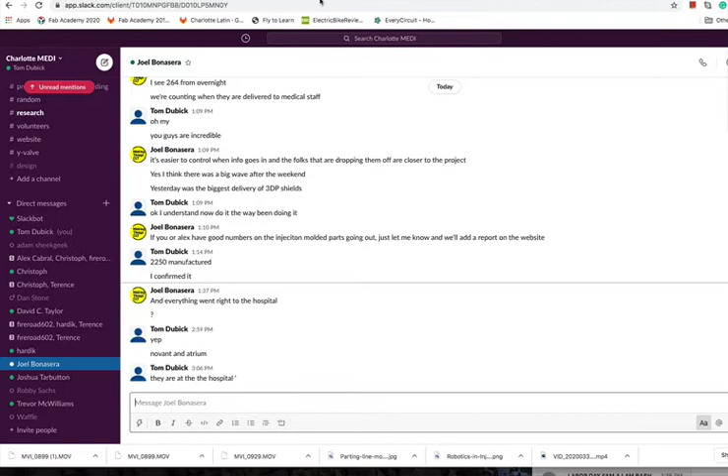All right, and I'll use Slack. We're going to show that they are at the hospitals. All right, so we'll come back to that in a moment. I may go ahead and edit that later today so we don't flash his email out to everybody in the world on Slack, but that's what it is. Let's go back over here.

So let's go through this real quick, shall we? Quick review. Let's do this, let's start from the beginning. Bear with me one second. Sorry about this, all right, hopefully you're seeing this up here.

Well, that didn't... what the heck? That's annoying. Mr. Dubick didn't click on the right square there. All right, so here we go. All right, folks.

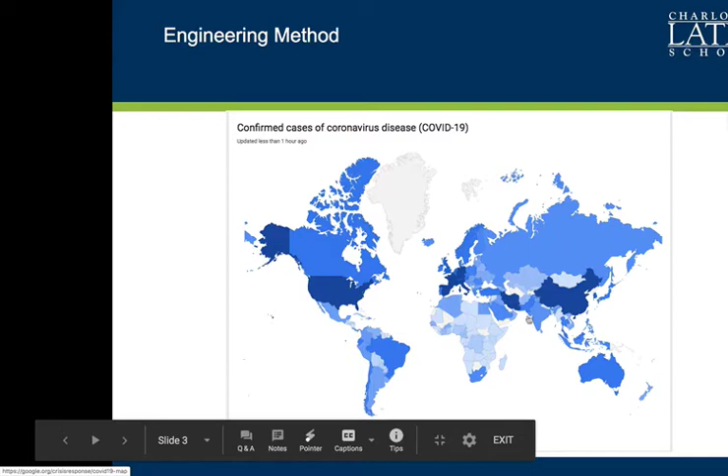Let's check where we are. The outbreak is still pretty much here, though it's now starting to show up throughout the rest of the world, which is pretty much guaranteed. That's the nature of a virus, it's really hard not to spread.

Let's see what we are today. How many total cases worldwide? Now we're getting at 9/10 of a million... 900,000. The United States now leads the world significantly as the biggest country that has it, with over 200,000. China was at, to give you an idea, 81,000. Italy was 110. So there we are with that, okay.

About 10% of deaths occurring in the United States that we know of. These numbers on deaths and recovered are going to be very nebulous, we don't really know all over, all right. And that's out of a lot of people, folks, out of a lot of folks.

All right, now I'm trying to... okay, then we're going to go to this. I think we're going to see this spiking up more. There we are, okay, I agree to that. This is where we kind of knew it was going to head to, and now it is here in a big way.

They've got all their paywall stuff, pay stuff there. All right, here's the United States. China's curve flattened, Italy's curve is flattening some, it's not going straight up anymore. But the one that's just off the charts right now is us, and we're at over 188,000 cases. So we need to get that to flatten.

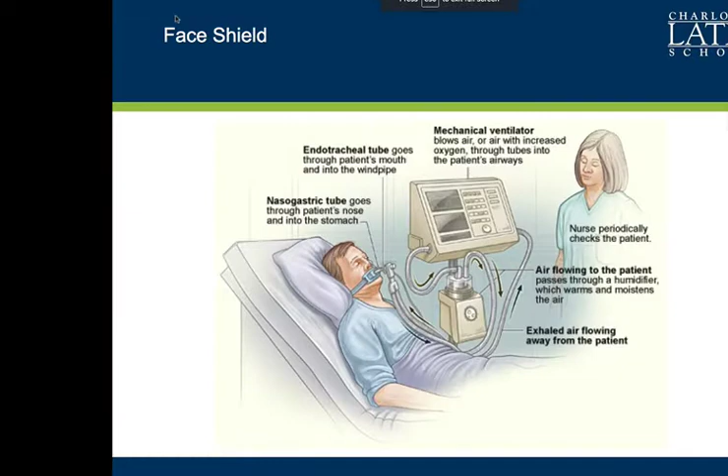Okay, so that's where we were with that, and it is what it is. All right, we talked about there's a shortage of medical professional PPE, that's what you hear about. And we talked about that engineering design process being really important to this. So, as we thought, time to make it, materials, equipment, prototyping, cost.

It's what you're always considering, and a lot of these things are honestly true every time you do an engineering problem. It does matter what the material is, it does matter what equipment you're using, all those things are true. What are the medical staff saying? That's one thing others do, research when you do things.

And that's a mask we decided not to actually use, so now we're using the face shield. And like we just said when we started over, I think we're going to be over 3,000 face shields today, which is kind of amazing. As we got, when you do the engineering method, come up with your idea, but then test it, iterate, make it better. I can't stress it enough. As you go on to be engineers and technical people, see, there's R1, it was too small, R2. We don't even make the RC1s anymore, we make only RC2s.

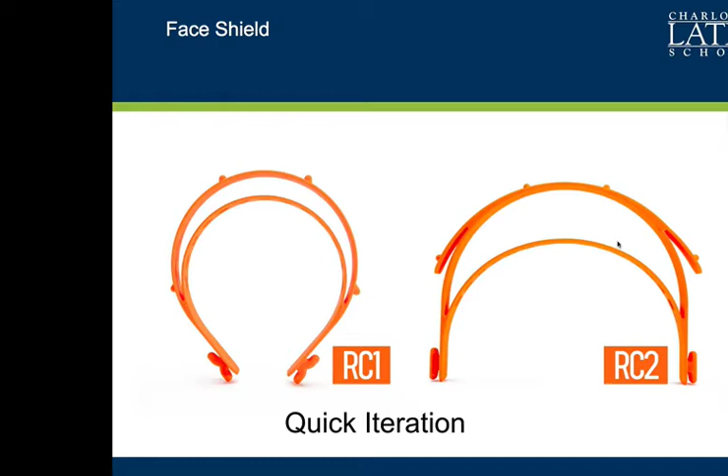And there's an RC3 version, but we're not going to worry about that one right now because at this point, we've got something that's working and we're going with it. You get feedback, you're going to have failures, that's all good.

Also, you want labeling, so I'll give you an idea. See how the clear strap only goes to the headband here? Don't worry about the colors, you can tell we had just different people printing it. Up here it gets much bigger.

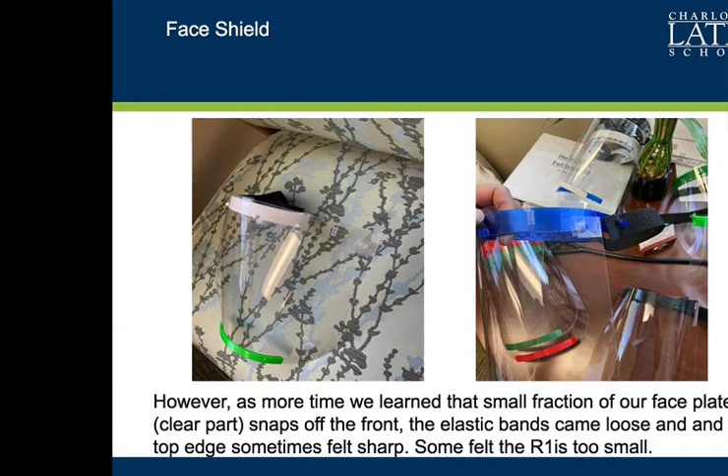And we started our Facebook page, which, by the way, what's that up to these days? We'll look that up. All right, GoFundMe.

Oh, GoFundMe, face shield, faceplate Charlotte. You think I've been looking at it enough now? I'll go find that. There we go.

All right, we're at $92,000. Not too shabby. And what that allowed us, that's not what I wanted, I don't know why they did that. But it was at $92,000.

And what that does, and I would highly recommend doing that down the road if you're ever in a project like this, it gave us money while other people were busy having to raise the money, convincing people it was important they got their money. We were able to get going, which is indeed very fortunate.

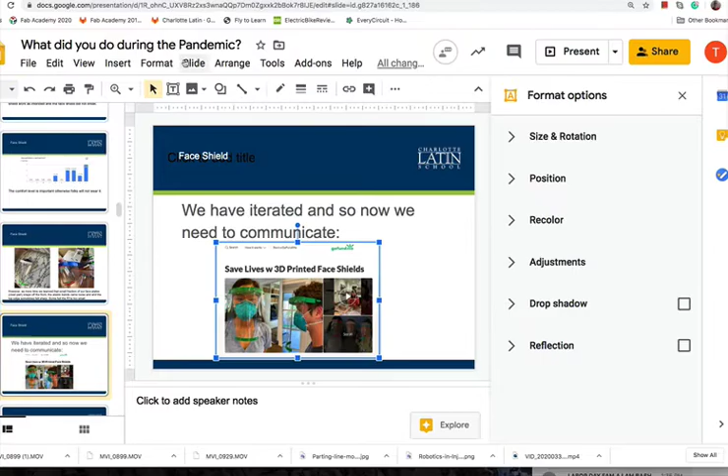Okay, and that also shows you this became Medi, Charlotte Medi. It became more than the people I'm involved with, much bigger than me, much bigger than the other people involved. There's now hundreds of people involved, probably nearly 100 people involved now. I know we have 50 families or so, it's got to be that.

So with that in mind, Slack and GitHub, I want you to see Slack now. I'm going to bring up a version of Slack. Hopefully I can get out of that. All right, I'm going to go over here, switch to, young engineers of today. All right, this is what I want you to see.

And I'm going to ask your folks, I've been very impressed with this. So what Slack does, if you're ever in a big group, you got to organize it. Maybe you're going to do some kind of school, raising money for your basketball team.

Hey, Carson, glad you're with us, buddy.

This is what Slack does, and we can keep adding channels. So let's learn about Slack. I got a column there, channel, create a channel. So a channel could be making contacts, contacting folks. Contact, well, that might even be on there, but let's see. Let's say contact, okay, create.

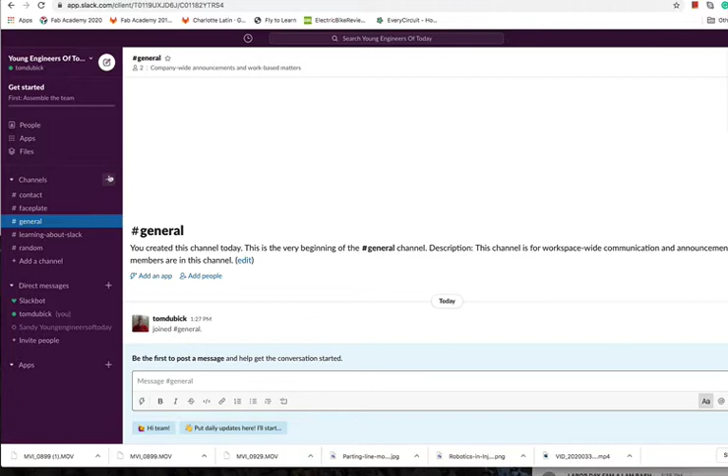There's a visual programming language for processing that we're going to be doing. All right, so we create that group, then anybody in their group has that, you can add all the people into it. Whenever they were referring about processing, we post them there. So I would highly recommend this, I'm sharing this with all my students. Down the road you'll go into the workforce, and if you're a tech person working with software, you're definitely going to see that. The other one you're going to see is GitHub. We'll come to that down the road.

All right, so now, having said that, we'll get into something that's actually going to look pretty cool. So that was a quick 3-minute summary of what we're doing.

Now, there's a 3D printer, and that's versus injection molding, and I said we'd talk about it. One 3D printer will print 4 shields in 8 hours. Injection molding prints 4 shields in 1 minute.

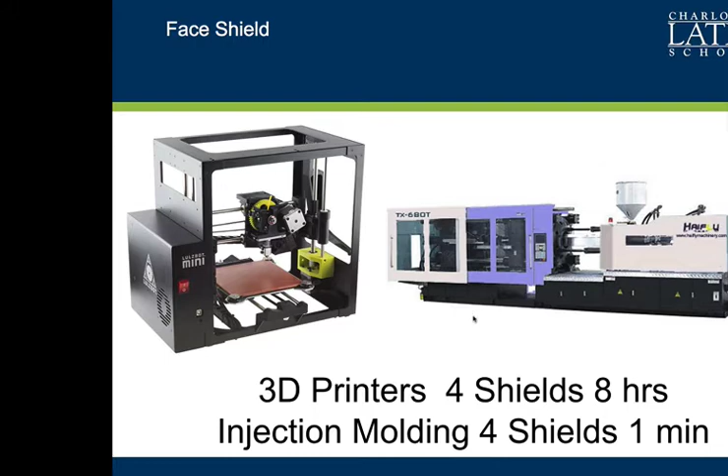So watch this, watch this. This is only a 3-second video. I'm going to make my volume loud so you can hear it, and then remind me to turn it down because it's going to get really loud. You're going to hear it in a moment. Let me go ahead and turn this way up. Watch this.

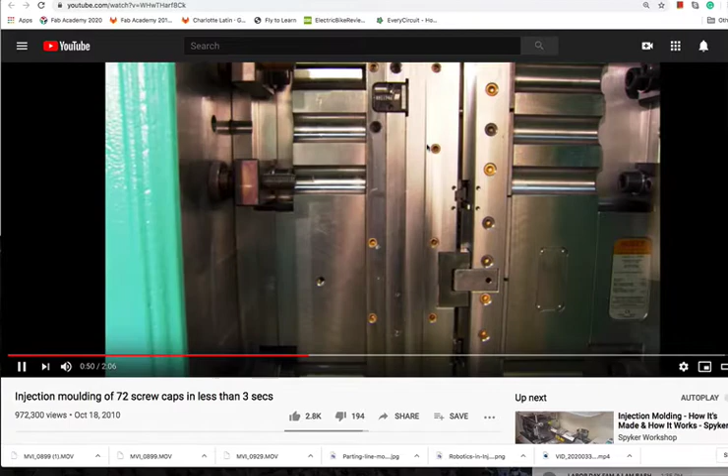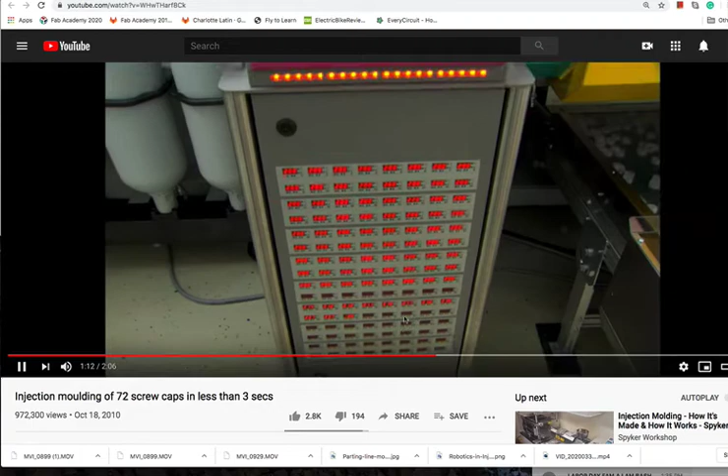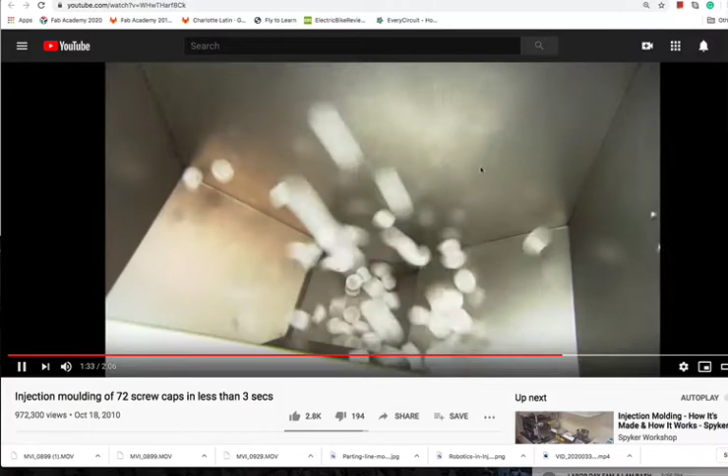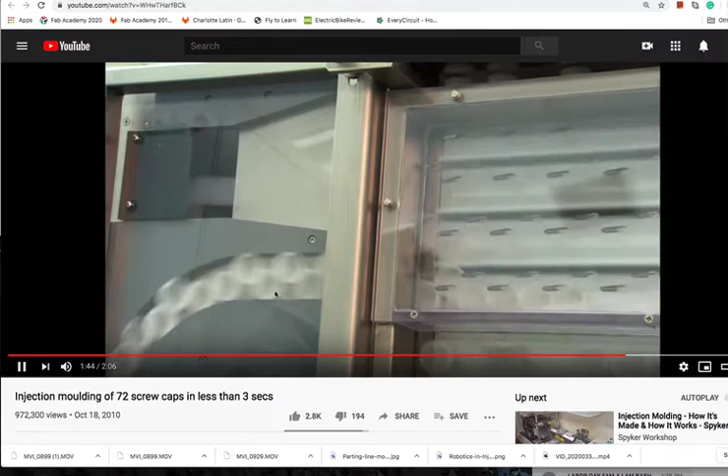See that? They're injecting out. Those are all bottle caps being made every 3 seconds. All right, they're pouring out here at the bottom. So every 3 seconds, see them all pouring through, then they're going up this ramp here. That's them all coming out the side there. They're coming out so fast. Look at that, how clear they are. Just fill up this drum.

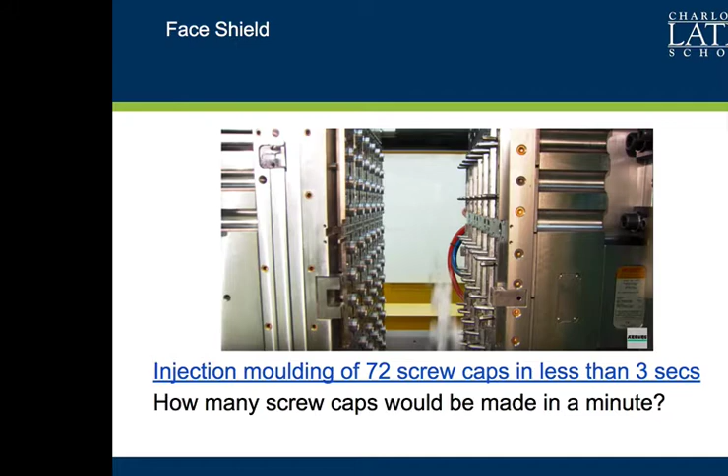All right, now again, next week, like I said, we're going to start processing, and then we're going to be building some planes to get you outside some too, down the road. But right now, let's look at this.

Hope everybody saw that, it's awesome. You can see how fast things are made. All right, so you can crank out everything in injection molding.

So the next part of this is I'm going to go a little bit of a dive on injection molding, because I want you guys to see it. This chair is made out of injection molding. Anything out of pure plastic. Model airplane, injection molding, these little pellets are what we're going to use. This is based on the lecture given by Bill Hammack, University of Illinois. I want to give credit where I'm getting content from. Really an amazing guy, and if you're into engineering, he does a really super job of this.

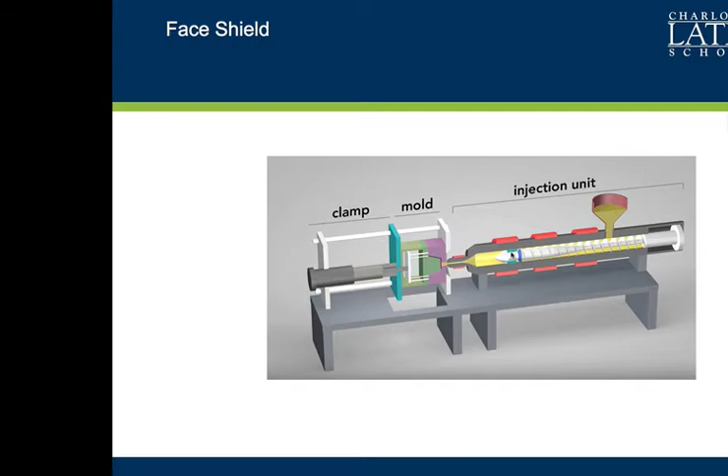So we're going to go through the parts of this. On the right, this is the injection unit, and we're going to get into labeling each of that. Again, your mold and your clamp. These are the pellets, we have big buckets of this stuff that we pour in there.

What's also great about these pellets is you can take that chair that's injection molded and recycle it, and they can remake it into pellets if we used it. So it's a question not of can we do it, it's should we choose to do it. And if we did things in our economy to encourage us to recycle and not just end up in the waste in the ocean. So here's the hopper, we pour the plastic pellets in.

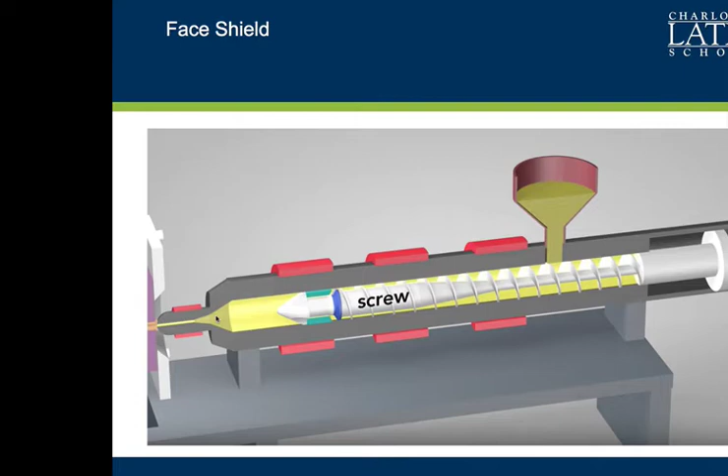It starts to fill this up. As it's moving across in the screw, we're able to move the molten plastic down there. It becomes molten, and we press that into our mold.

So this is the cavity, they say. The mold shoves in there. This is where we're going to make, right here, that red line. This is injecting into it. It fills it up. Notice there'll be a little piece left over when it fills up, when it goes away. There's the mold right there.

All right. Folks. So it pulls the mold there.

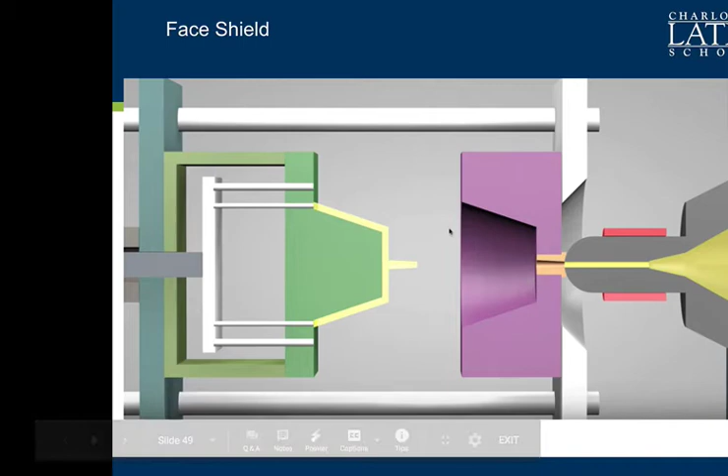Now look at these white rods right up here and here. This kicks those molds out with that white piston. And then now that's your printed part. This part you're going to rip off. There's your printed part. Surely somebody has a question or a statement about this now.

All right, that way, step up, Ian. Ian, all right, well, I'll go with Ian. For some reason, you're muted on your end, so I can't hear you. I got you. All right, there we go. Now I can do it. Let me go Ian first, and then we'll go to Ryan. What do you think, Ian?

How is the mold made for this machine? Are they custom made? Great question. The mold is actually the really expensive part of this, and we're going to get to mold making in just a little bit, once we get this process down. I'll show you. But what they do is, just like you know how we have that CNC machine with the wood, they use a CNC machine to cut it out. A metal mold can take a week or more to make.

They tend to be very expensive. $30,000 for a mold is not unusual. I think it's $9,000 a chamber. So you're going to get into real money when you build a mold. But then you have the capability to make 10,000 parts, you can use the mold 10,000 times, so you're able to spread that cost out over it. And a high-end one could even last longer. Great question, I'm going to show you a video on how that happens in a little bit.

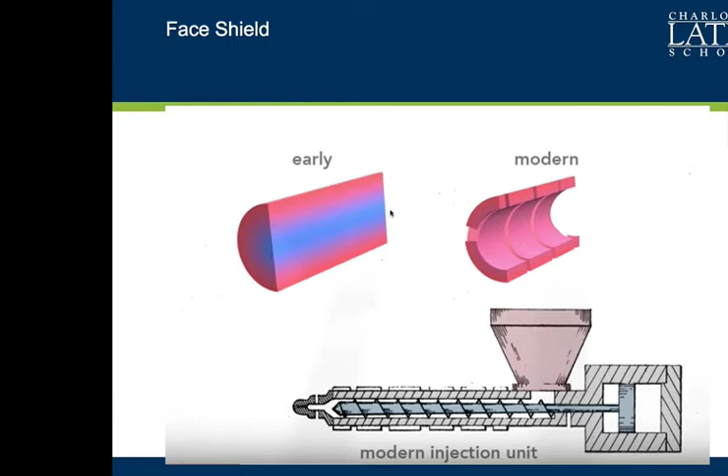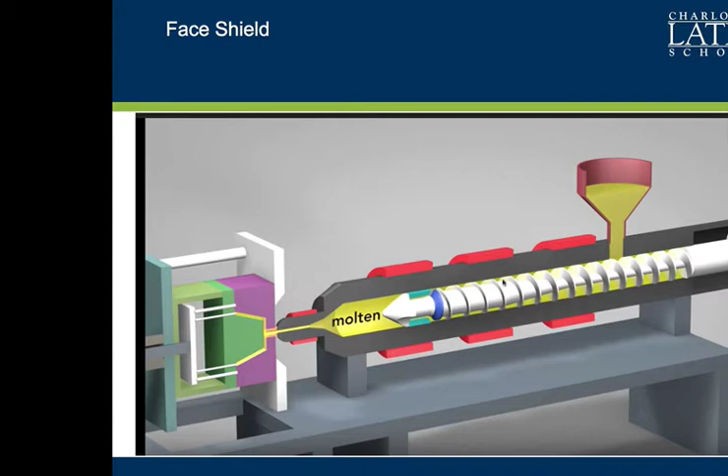So they put in a screw, and the nice thing about that screw—let's go back in here—this screw, basically, if you look up at the picture, what that does is the molten plastic stays on the outside. The screw fills most of this up, and therefore just the outside of this gets hot, certainly by the time you get here.

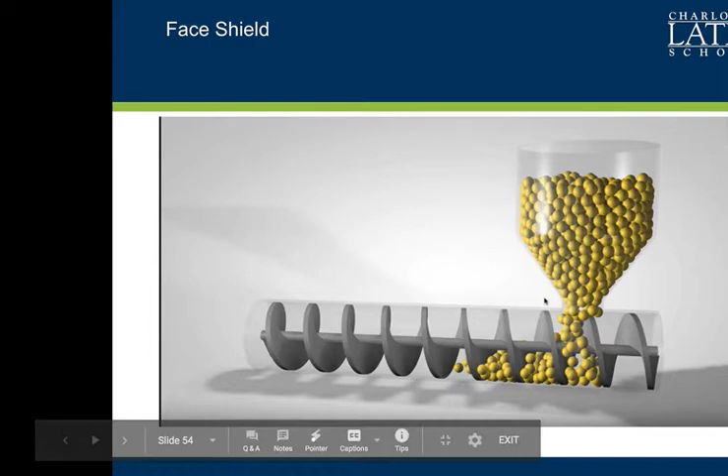The next thing it does is these flights allow you to send your plastic. It mixes it around, allows it to spread the heat, shearing it, mixing it all up. And you can see it right now, so as the plastic goes in there, it's all getting mixed up, agitated, shook up more, getting the plastic warm. Then the third thing it does—see how the molten plastic, as it goes in, this area gets up higher and higher—what that does is the plastic's actually grinding inside this tube, so it's really going to melt now. That went a long way to get consistency.

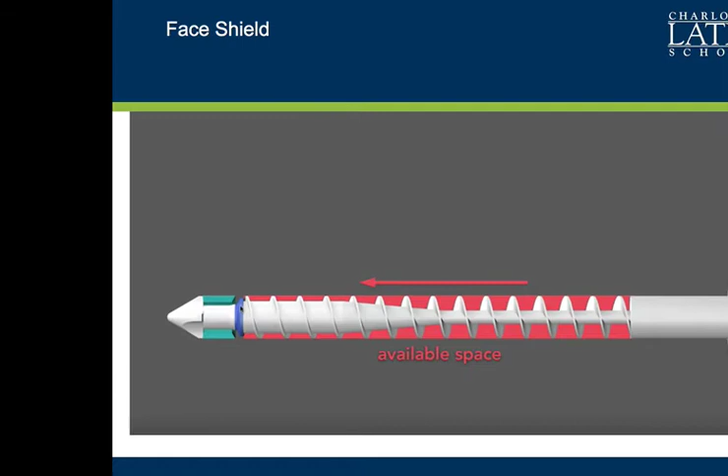And here you are, so here's the plastic going forward, getting blobbed out, melted. Then what happens is the plastic about to be inserted goes through these flutes right here, and this ring, as this comes up—this check ring up on top, and there's a thrust ring. So think: before these meet, the plastic can get in here. See, there's the thrust ring, there's the check rings. But once you get to here, thrust ring hits the check ring, the plastic can't come out, the plastic can only go forward. These are ejector pins right here; that's what pushes us out when we go through it.

So here's what I really want you to do today: when you get a chance, I want you to look around in your house, and if you've got plastic silverware, you're going to see these little marks—these little injection marks, okay?

They're called ejector pin witness marks. And if you start to see things in plastic, you start looking for them. You can see what that was an example of, where these pins pushed out that part that formed this plastic fork, it looks like.

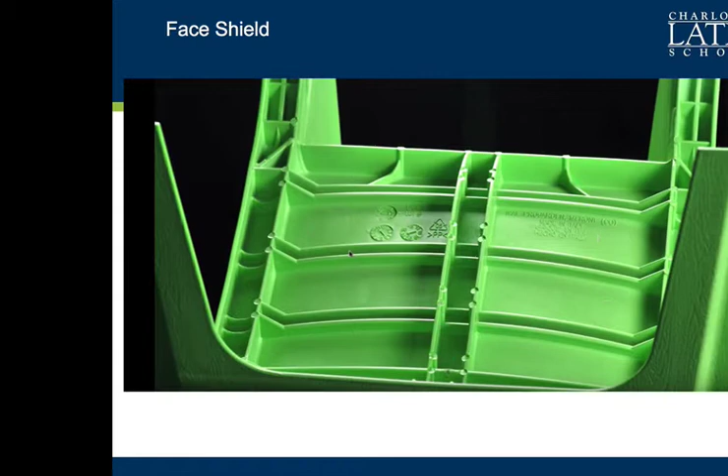Let me show you more examples. This big chair, which I find amazing, was done in an injection mold. But see these marks right here? 1, 2, 3, 4, 5, 6. Those are all the pins that shove this out of the mold when they make this chair. I'll even highlight them for you. There it is right here. See, those are all the places all the pins push that big plastic chair out. So believe it or not, that plastic chair comes out.

Down here on the left is a date. This will tell you the date, time, when they made something. This also tells you it's recyclable. So that's the information they stamp on all these chairs.

Just like with the face plates, where every once in a while I'll have a failure on face plates, and I really wish I could tell. As we've gotten bigger, we're not tracking it as much by part numbers, and not everybody can label it just by the nature of that. It's really good to have it, we've done it in the past, but you can't do it as much as you'd like.

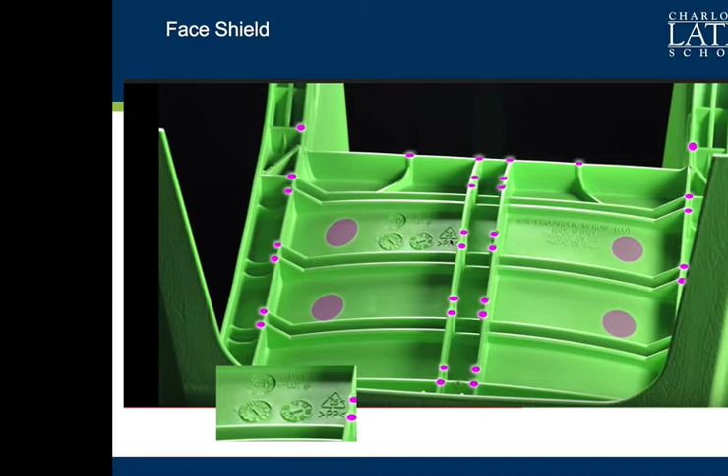All right, Ryan, did you have a question? Oh, my hand was up there. I thought maybe for a second.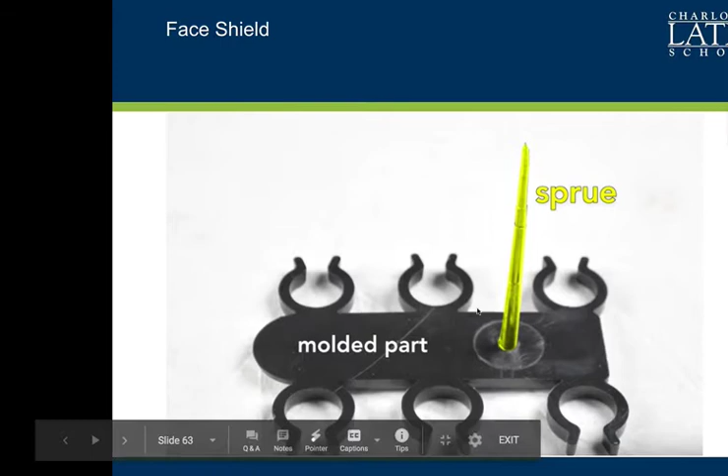All right, let's go on to the next part. When you make the part, you know how it's injected here? This is called the sprue, when we get rid of that. There's your molded part, the part that was molded in there. The sprue can then control runners that go to all these spoons. So the injection mold, think about the injection coming this way and then spreading out.

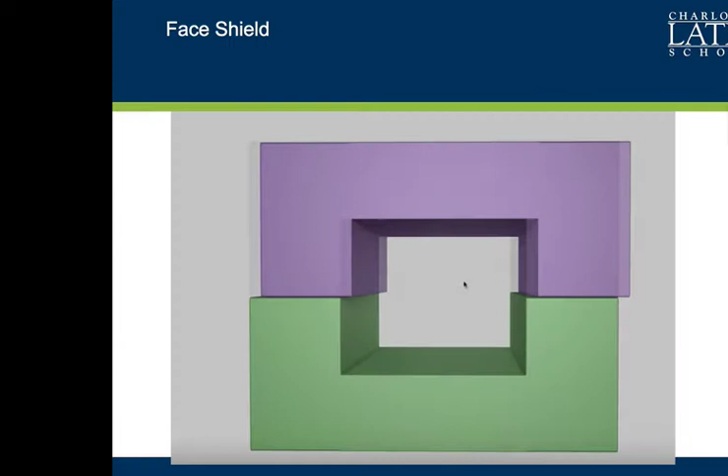How many of you guys have built a plastic model airplane, or car, or something that you had to glue all the parts together? Ian has—my goodness, it's one of life's true pleasures to make those things. Well, when you pull them apart next time, this is remnants of the mold injection—I always want to say cars had fuel injection—and that's what that's from. I just wanted you to see that.

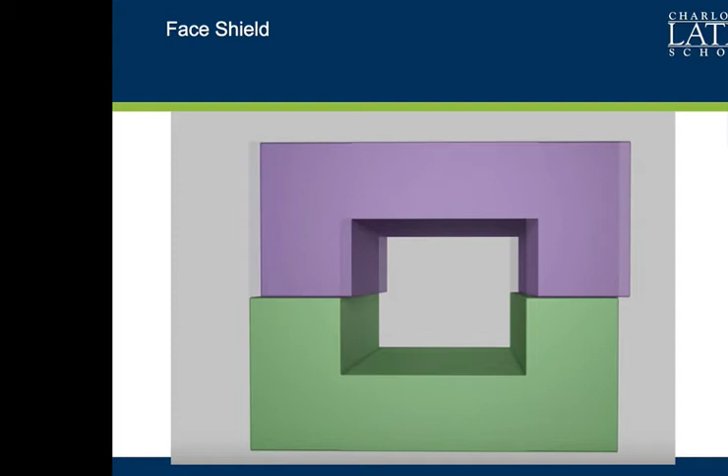Now, when you do a mold like this, the mold is never perfectly aligned. It's impossible for it to be absolutely perfectly aligned. So you get what's called a parting line, and you'll see that in things that are injection molded. There's a parting line right here in this piece of plastic.

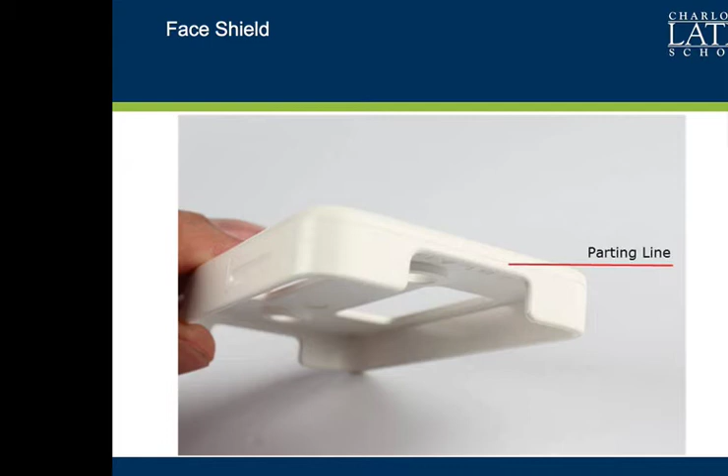So if you look around, you can find these marks. In fact, that's what I'm going to ask you to do after class today: just walk around and see if you can find some plastic. It's everywhere in your life. And you'll find parting lines and the ejector pin witness marks.

These are called date wheels—not the time, the date. I guess I said time a minute ago, but it's date. Now remember, when you go to inject this in, this is the remnants of this.

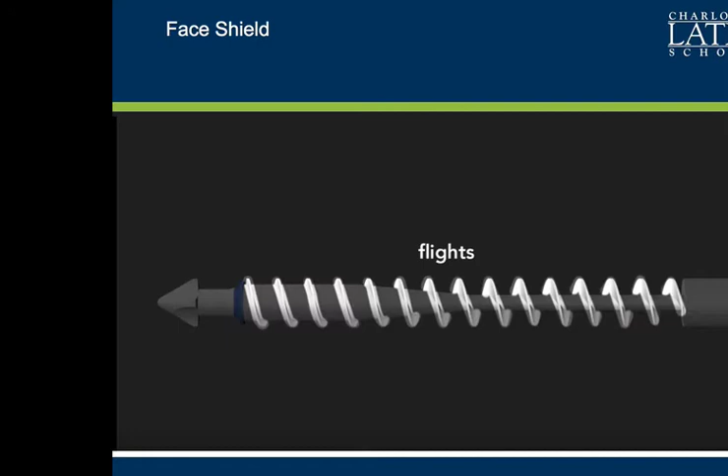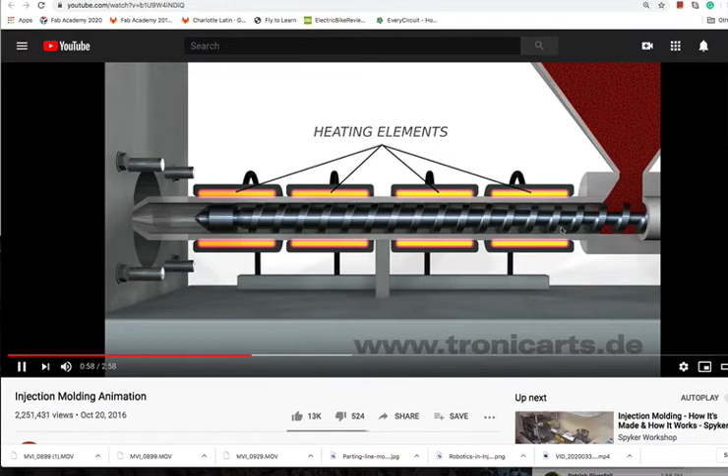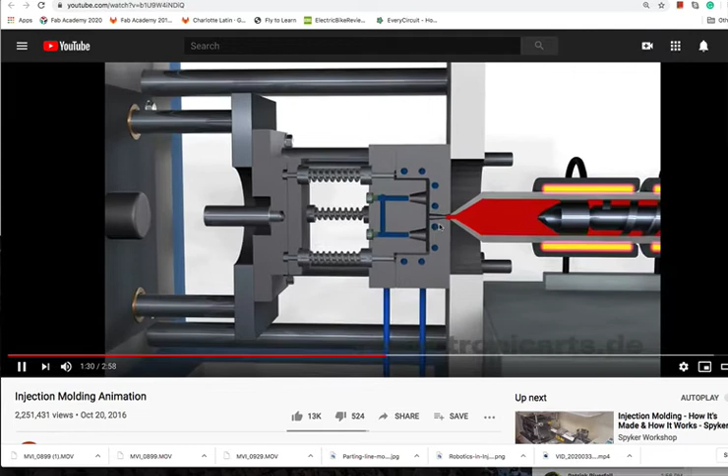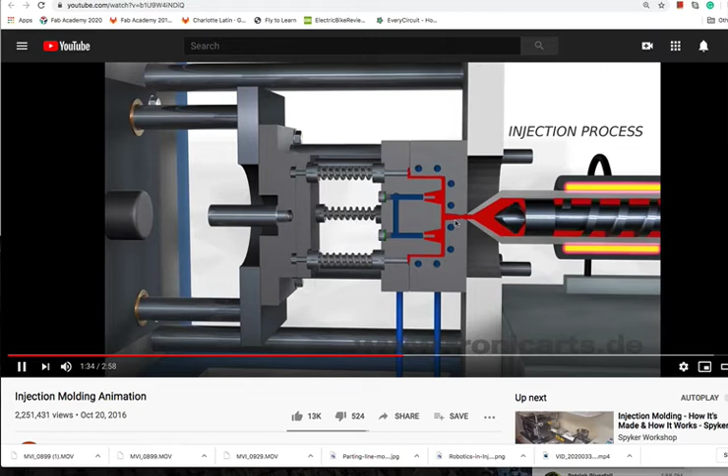And it's that sprue right there. That's the remaining part that's going to get snapped off. See, when the mold comes out, that little piece of junk's going to be left over. They snap it off. What's interesting is they immediately take it at the mold injection place, throw it back in, and reuse it. They don't waste it.

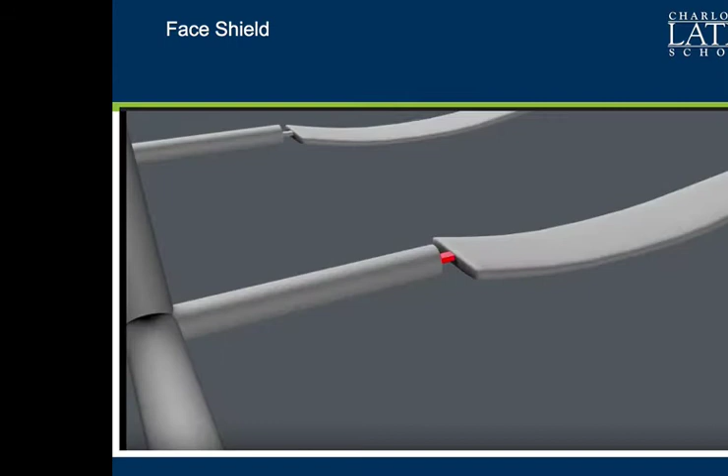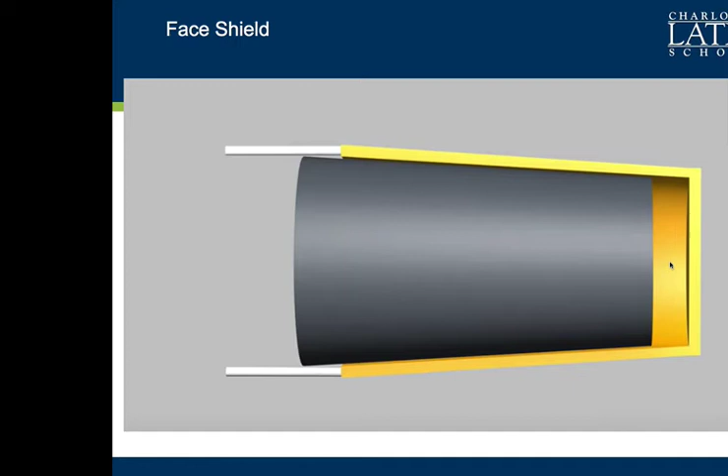I'll get back here so it makes more sense to everybody. One thing is, they pull that mold out. If it was totally square, you'd create a vacuum and there'd be a lot of friction all the way along, making it hard to eject the mold. Remember, we have that part where you go to kick this off, right? See how we want to kick it out? We don't want rectangles, we want this angle. So when we kick it out, there's only a little bit of friction at the top—less friction, because as it went farther out there'd be more and more space, plus the air can get in there and there's no vacuum. Little subtle thing, but it made a big difference in designing these.

Now, you asked how do we make the mold? I'm going to go right here and do it. This is a pretty cool video, about 3 minutes long. I'm going to make it obnoxiously loud so you can hear it. All right, here we go. Well, let me go back.

If you take a close look at the products around you, you'll notice that many are made of parts that have been assembled together. One way factories make product parts is by melting materials such as metal, rubber, or plastic, then pouring or injecting them into molds.

To make a plastic part for a product, the manufacturer has to first commission a mold-making company to design and produce a plastic injection mold.

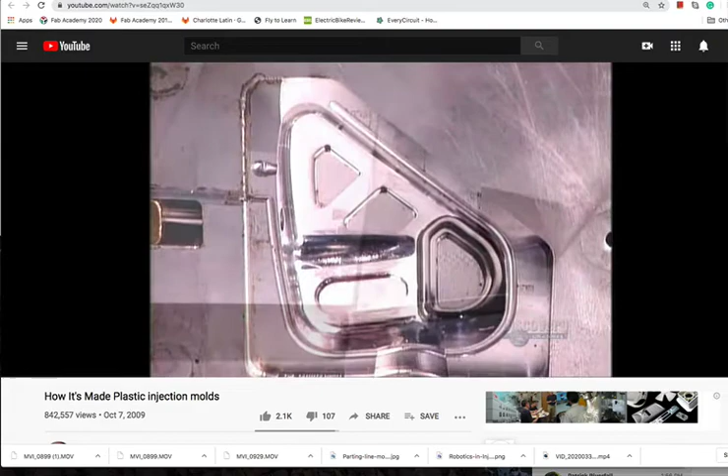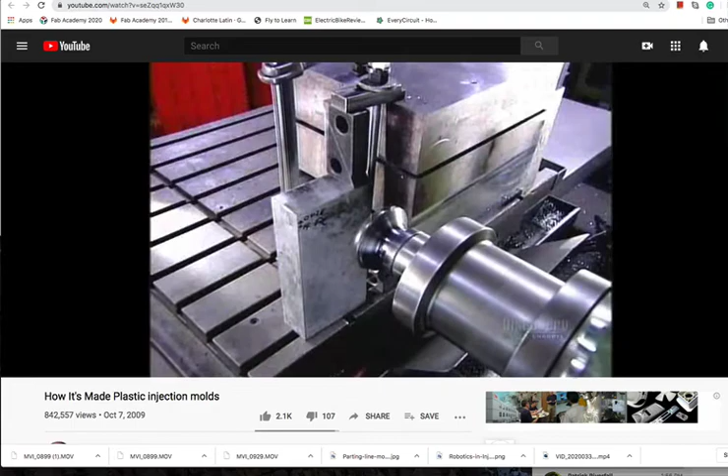The mold begins as bars of chromium steel, a high-durability metal that can withstand repeated high-pressure injection of plastic. Workers assemble several bars into a block called a mold base. They mount this base on a milling machine, which shaves the bars to the right dimension. This step is critical, enabling them to later machine the base into a mold that's faithful to the technical design, right down to the 100th of a millimeter.

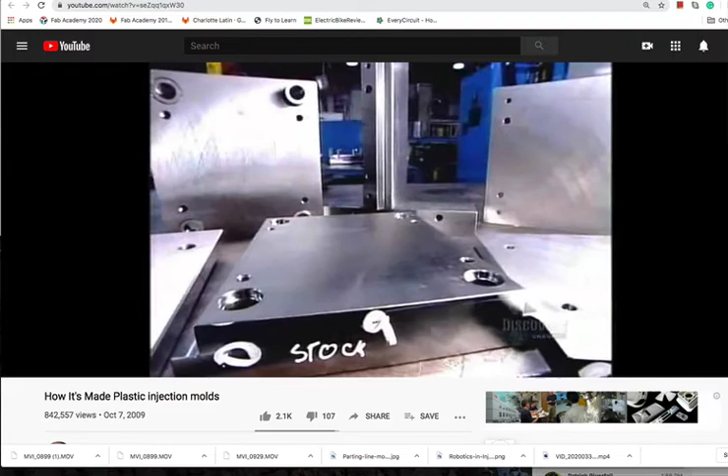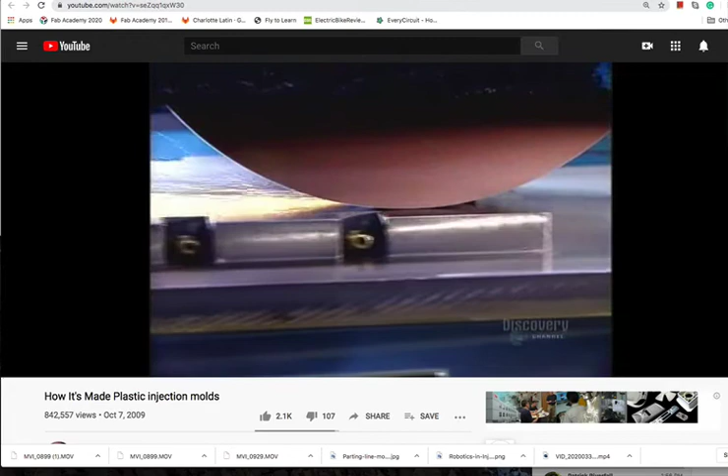A mold usually consists of two halves, each comprised of several components. The factory drills strategically positioned holes in the bases for the guide pins and bushings that hold the components together when the plastic's injected. A grinder now goes to work smoothing and leveling all surfaces, preparing the base for the high-precision machining operations that will transform it into a mold component.

A computer-guided tooling machine called the CNC.

That's a CNC, but that's just a version of a CNC. We have a ShopBot on this. I would like to get a mold injection for the lab. I really do want one. I just got to figure out how we can use it.

Slowly the machine machines the base, wearing away the steel particle by particle to create the mold component's shape. This one, part of a mold for the plastic rim around a snowmobile's front headlight, takes 20 hours to complete.

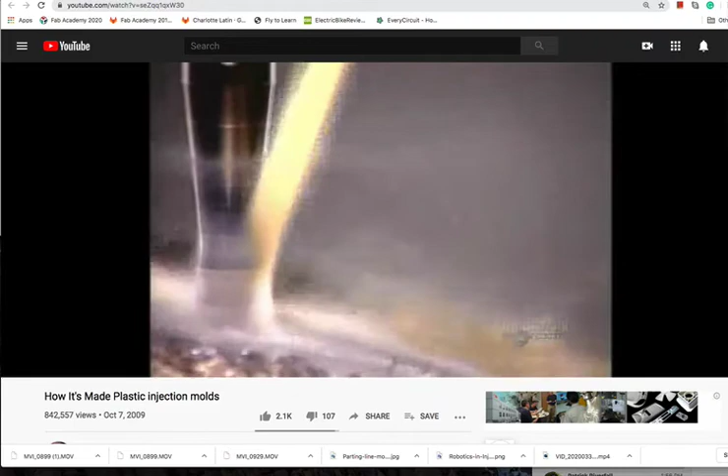From here, most mold components go on to a second tooling machine, especially if they have fine detailing that this CNC machine isn't capable of carving. The second machine is outfitted with a copper electrode in the shape of the plastic part, in this case a snowmobile oil gauge. After polishing the electrode to ensure flawless casting, they use a sophisticated measuring device to verify the dimensions.

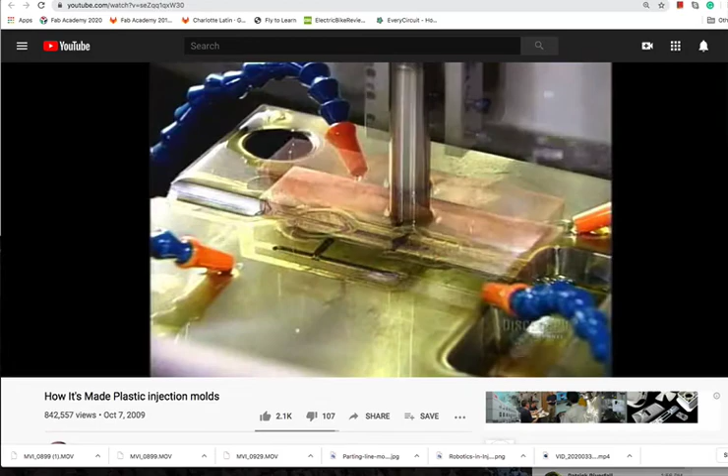The electrode goes face down on the second tooling machine, called the EDM. Directly underneath is the mold half that's already been partially formed on the first machine. A strong electric current runs through the electrode and penetrates the mold, forming a cavity in the shape of the electrode.

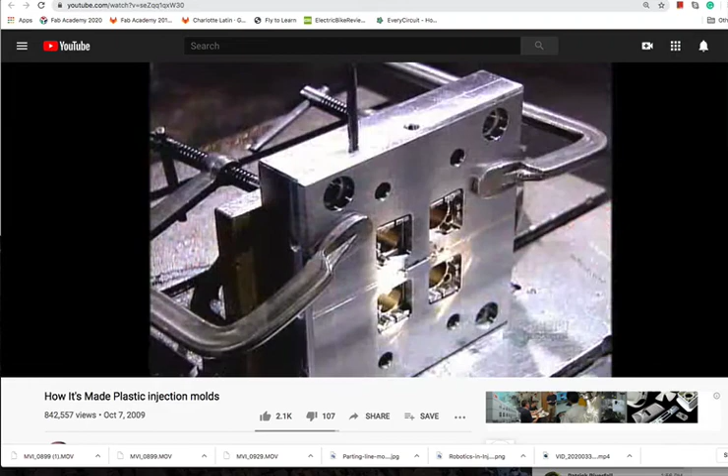After tooling, they drill coolant lines. This is for the cooling fluid they'll use to accelerate the hardening of the molten plastic.

Some plastic product parts, like that snowmobile oil gauge we saw earlier, have lettering on them. The factory engraves the letters in reverse inside the mold cavity. After the plastic's injected, the writing comes out frontward and raised.

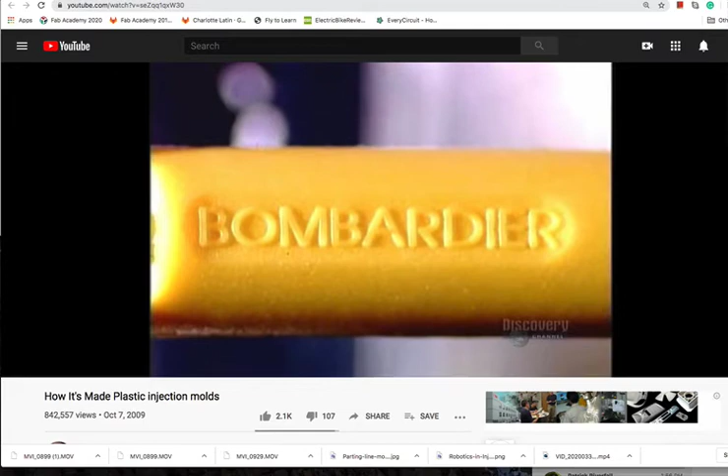The surface of the mold cavity is pretty rough from all that tooling, so they polish it smooth to ensure a proper casting. Here's what the two halves of a finished mold look like. You can imagine they've spent thousands of dollars to get to that cleanliness.

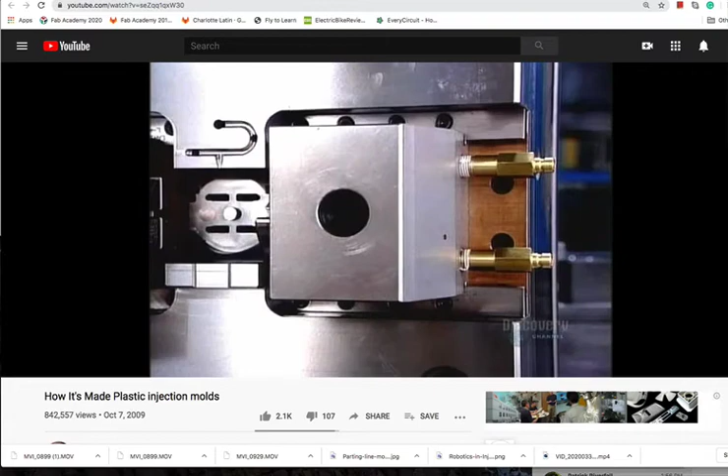The pins and bushings fit together to close the mold before injecting the hot liquid plastic. Once the plastic cools and hardens, it's just a matter of extracting the molded plastic part.

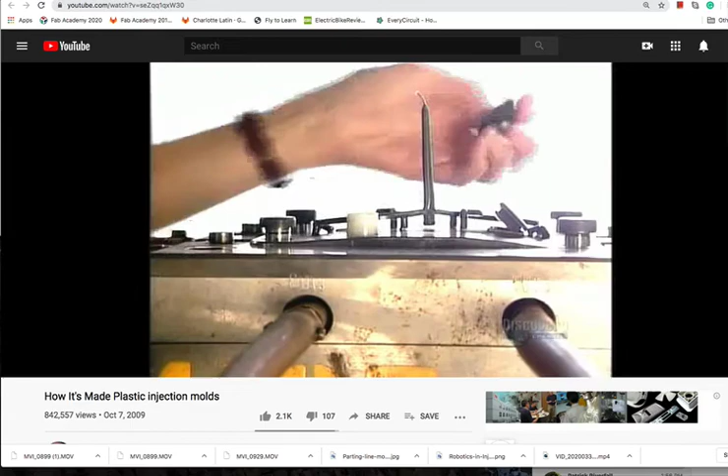Here's a different molding method, a two-step process they're using to make these buttons that go on the steering handle of a jet ski. First, they mold a structural base out of hard white plastic. Then they put the base into a second mold and inject a rubber-like gray plastic. This softer plastic covers everything but the raised lettering, giving the button a softer feel.

Factories also make molds for aluminum injection and rubber injection, among other materials. They build those molds from different types of metal, but using the same techniques.

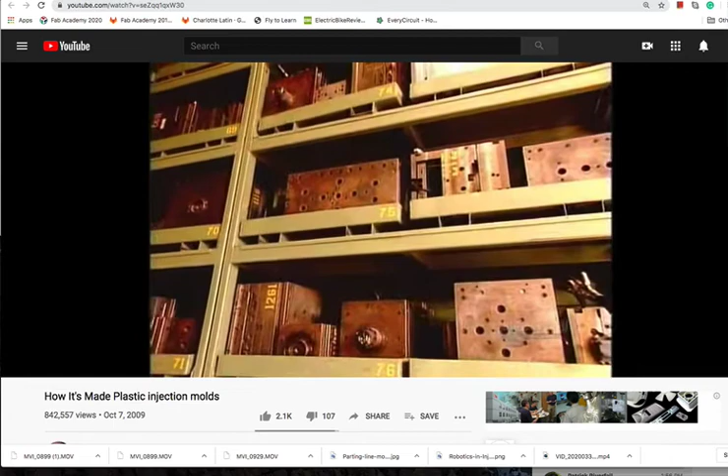All right. So I wanted you to see that. Any questions about the molding on that?

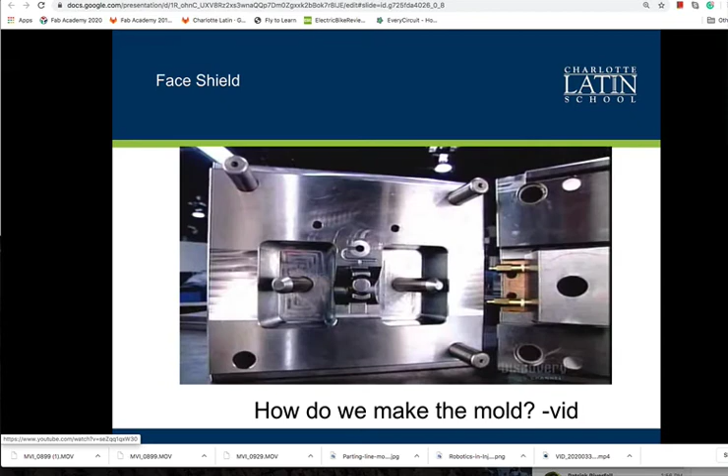Okay, if not, here's the next thing I want you to see.

Here is the mold. That's the actual mold that was being made to use for those face plates.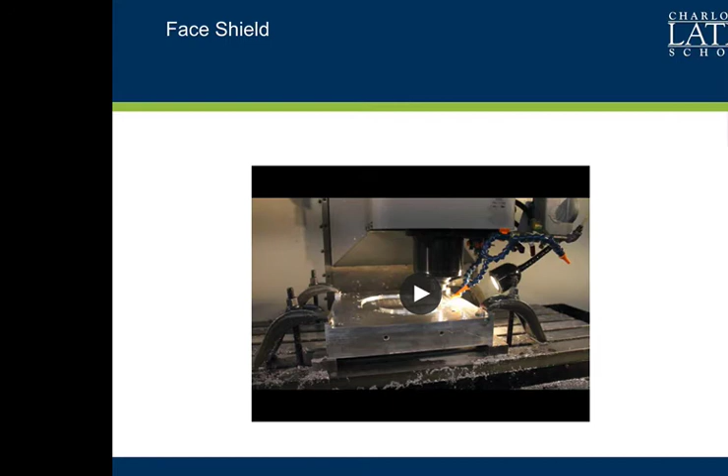Here's the mold injection machine. Here's where you pour in the material, you melt it, you heat it up, and put it into the mold itself. This is down in Gastonia.

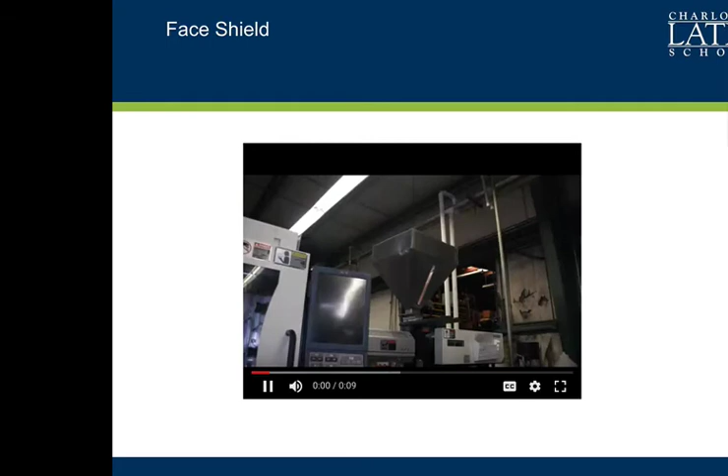That's actually right there, that's the white powder. They put it in 5-gallon barrels of it.

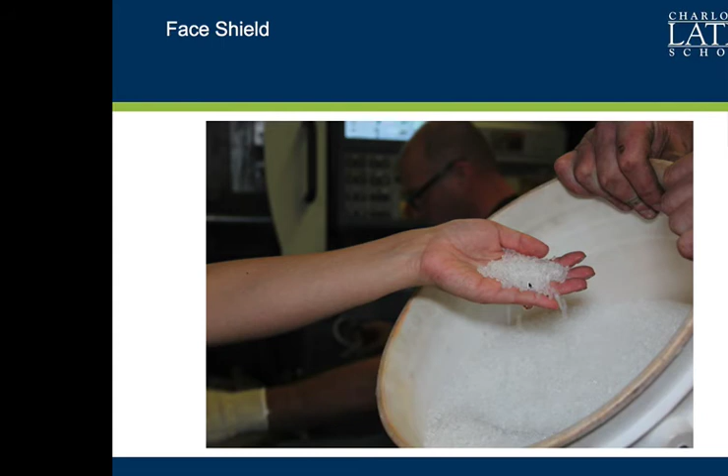All right, now this is the side of the mold. Let me show you up here. So I don't know how I did that. There's the handful of the stuff, of the plastic pebbles. I'm calling them pebbles. There's a mold on this side and a mold on that side.

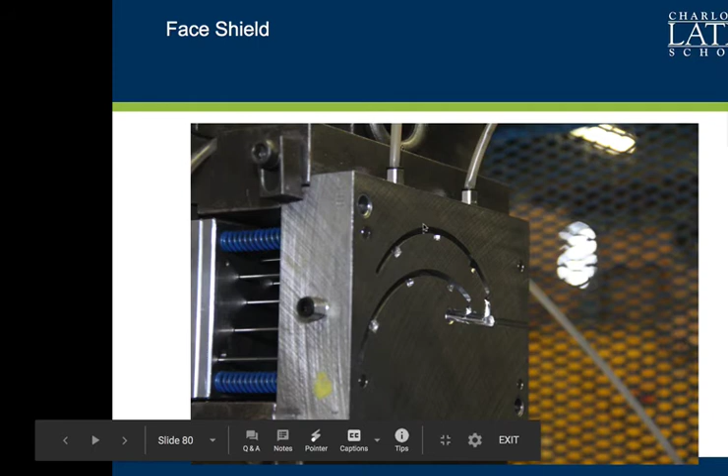So the right mold, this is the right mold. This is where the injection's coming through. And there's the left mold, and these are where the injection pins come out. So if you look at it, right mold's coming through, injection pins, and there's material coming out pretty rapidly.

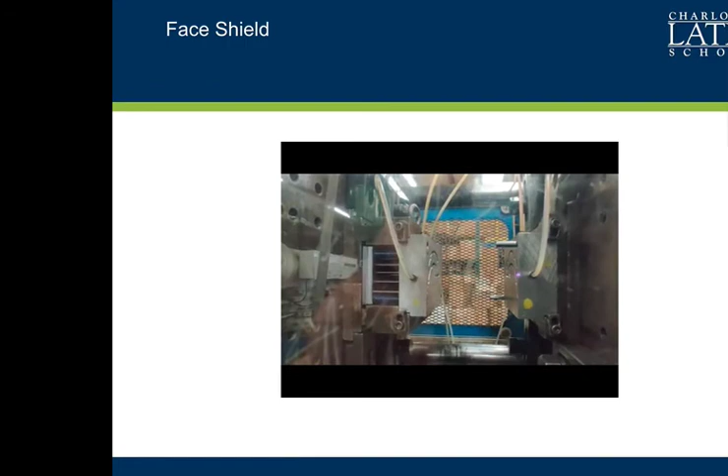So let's watch this. So that's how the mold starts working. Now I want to show you the money shot. Let's go to the next one. Watch this one. This is the money shot. Check it out. Here comes the pin through here, and that's what kicks out the mold.

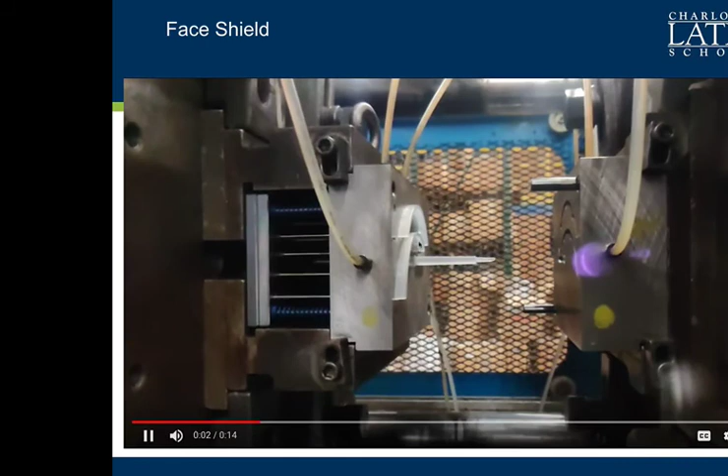Cleans up, does it again. Try it again. So it's filled it in, this thing's separating out, it's coming out. It was filled with injection. This we're going to get rid of. That's the sprue. There's the pin, pushes it out, falls down.

And this just repeats this over and over again. One more time. So, inject it, pins come in, press it out, drops it in. And folks, you now know - well, there we go - so they just start piling up at the bottom of that. So you now know more about mold injection than I would be willing to say 90%, 95% of the adults out there do.

All right, any questions about all of this? All right, Noah's got a question. Yes, Noah. My question was, is it cheaper to injection mold than 3D printing?

Yes, very quickly. Because that 3D printer, let's talk about it. So you've got a 3D printer. Well, it depends which stage you're in, let me answer it better that way. If you're at the beginning stage where you're prototyping, iterating, trying out an idea, testing it, you 3D print those parts, you're only making one of those - it does work. But once you're getting up to volume, where, for example, we're shooting today, we sent out 2,500 parts or something, it would take a lot of 3D printers to do it. And 3D printers, it wears them out almost, is the way I would describe it. They're just not designed to run continuously, not the kind of 3D printer you have in your house.